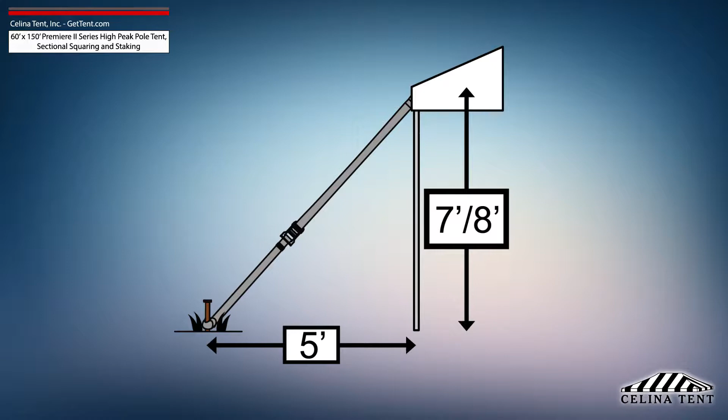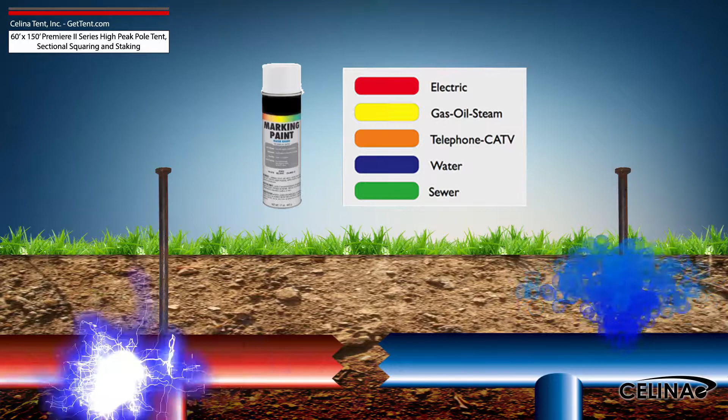Tent squaring allows the installer to accurately place all tent hardware and install tent stakes prior to beginning setup, and helps them avoid any marked underground utilities. Utilities must be marked by your state's local utility services prior to any tent installation.

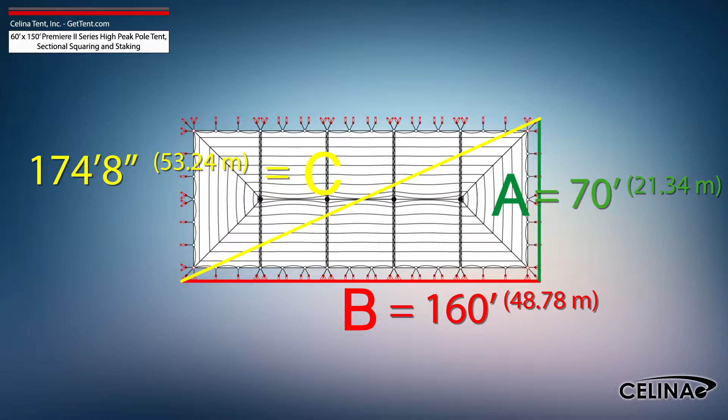Using the Pythagorean theorem and adjusting out for 5-foot staking, the entire tent footprint will be 70 foot by 160 foot, with a 174-foot 8-inch diagonal length. Celina recommends that a 60-foot by 150-foot Premiere II Series high-peak pole tent receives a minimum of 176 stakes.

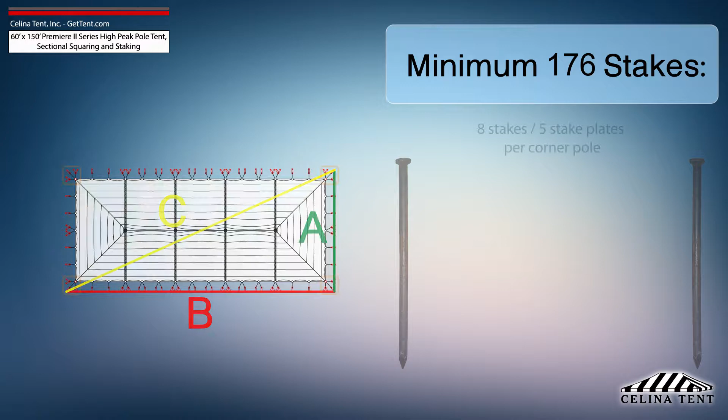8 stakes and 5 stake plates for each corner pole. 2 stakes and 1 stake plate for each side pole on end pieces. 4 stakes and 2 stake plates for each side pole on mid pieces. 6 stakes and 4 stake plates for the side pole at the center of each end. 6 stakes and 4 stake plates for each side pole at lace line locations. And 1 stake for each center pole.

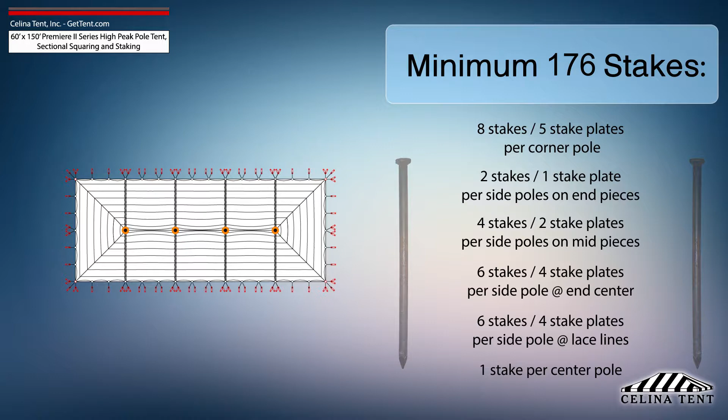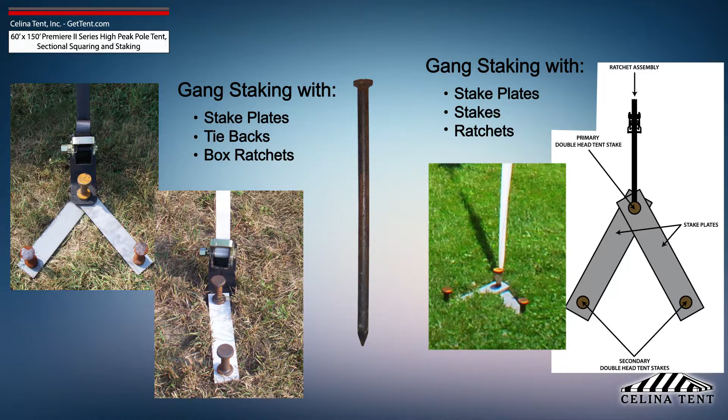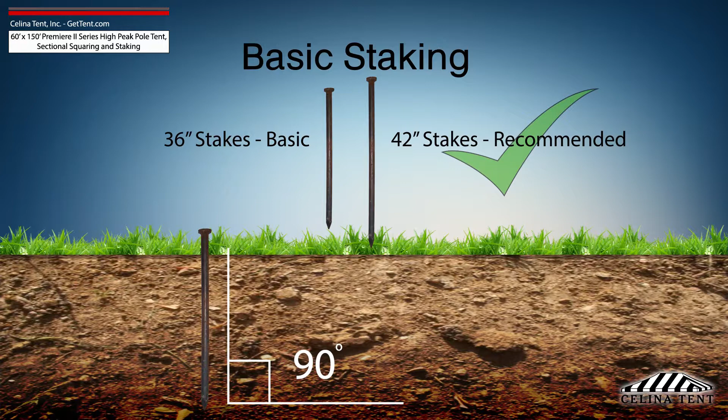This amount of stakes provides the minimum amount of security for a pole tent of this size. Additional staking is required for any site that doesn't meet optimal soil conditions. Tent staking is the most important safety procedure during tent installation. Tent stakes should be driven vertically so that the stake is as close to the ground as possible with space to tie on a strap.

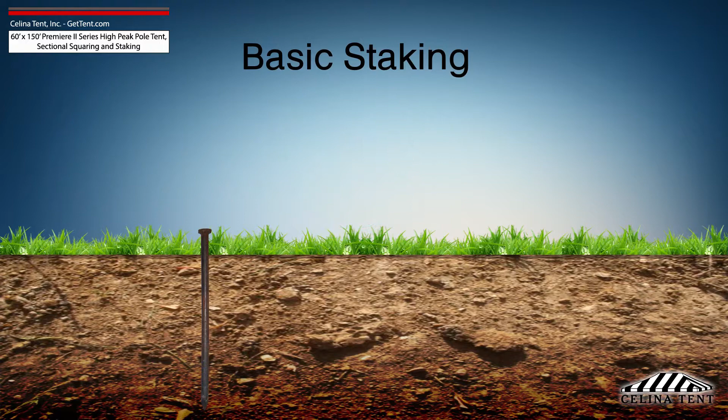Any length of stake protruding from the ground that is more than 6 inches will have detrimental effects on the holding power of the stake. Attach the ratchet strap or rope as close to the ground as possible to reduce strain on the stake. It is the installer's duty to inspect the soil conditions and possible weather effects for the duration of the tent installation. For water-saturated or loose soil, more tent stakes are required to achieve adequate anchoring.

Staking may be increased using dual stakes and a staking plate, or gang staking utilizing 2 staking plates and 3 stakes.